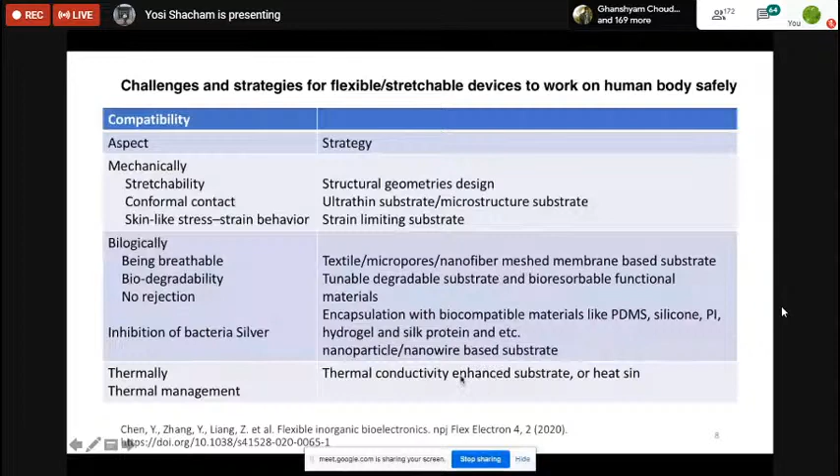So again, why flexible? You can see everybody talks about flexible telephones and flexible electronics. The other advantage of being flexible is it's robust. It does not break. You can have other problems, but if it falls on the ground, it doesn't break. You can fold it, it can be adjusted. Also usually lighter, because most polymers have a specific gravity less than metals, and it can also be environmentally friendly using green materials. And this is a very important issue, because if we are successful in microelectronics, we're using billions of devices, and the waste is a big issue later.

So again, why flexible? We talk today about flexible sensors. The whole field of flexible electronics is a very big field, but we talk today about flexible sensors only, which are mechanically compatible in hardness and robustness. They are biocompatible, for example, using carbon-based substrates, and chemically compatible. You want to functionalize them using organic chemistry.

Since we are using organic-based or silico-organic-based materials, we can do a lot of chemical modifications to the substrate, make them compatible, make them conducting, doing a lot of things. We talk about a specific section on the flexible sensors that are wearable. By the way, not every flexible sensor is wearable, but wearable is a very important section, on the skin, for example. This I took from one of the recent papers.

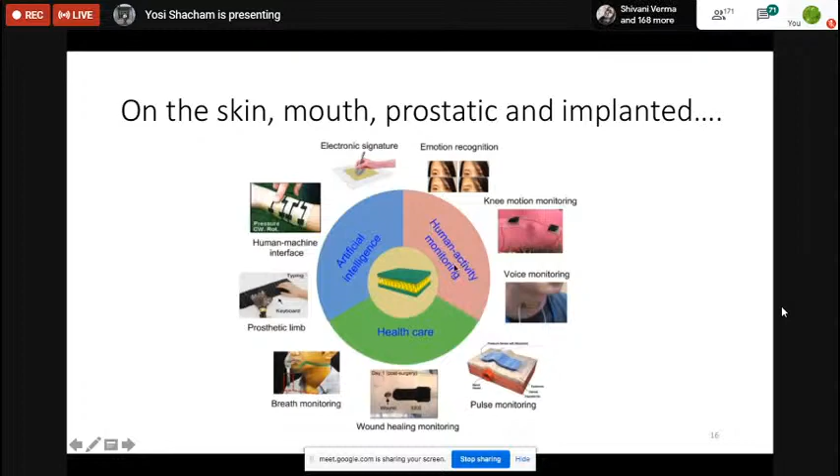You can measure electrophysiological signal, and everything you can transfer to a remote clinical device, and you can do self-diagnostics. You can even use AI, some deep learning mechanism to identify problems, and home healthcare in the future, we anticipate some of it to be, of course, we need physicians and personal contact is important, but many problems can be solved using this.

So if you look at the morphological control of micro/nanostructure sensing materials, and I took it from the same paper, first you'll talk about dimensional materials like nanoparticles, nanowires, nanosheets, and nanopores. There are 0-dimension, 1-dimension, 2-dimension, 3D materials. And from the biomimetic structure, you can make materials which are whisker-inspired, spider's crack-inspired, skin-inspired, hierarchical structures. So next I'm going to talk a little about materials.

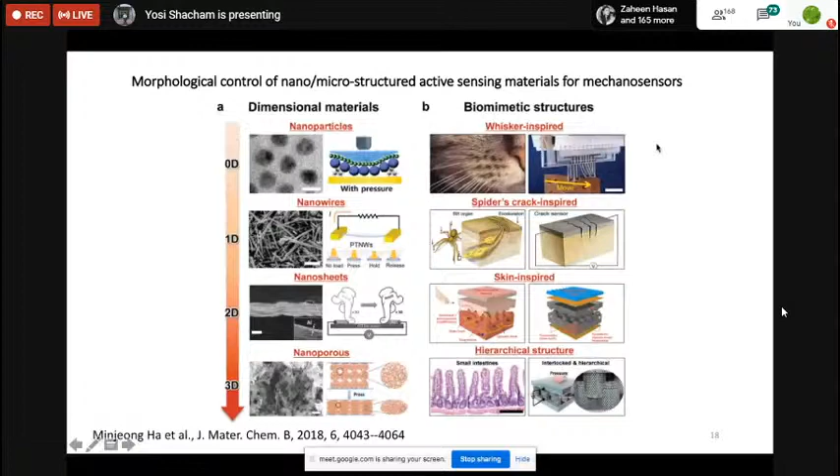And one of the advantages of using flexible materials is that we can shape them in very, very interesting structures, and we can integrate them with a lot of materials. Now, typical sensors, and again, I use this wonderful paper, saves me a lot of time when I present this to my students. What are the mechanisms for flexible devices?

For example, you can use resistivity. For example, you take an elastomer, PDMS, polydimethylsiloxane, with carbon nanotubes. My group, we mix it with gold nanoparticles, but the idea is you make a conductor mixed with an insulator, and when you apply pressure, they change their shape, and when they change the shape, they change the resistivity. So you can use resistivity monitoring, or you can put them between electrodes and measure the capacitance, and the change in capacitance gives you indication on the change of position.

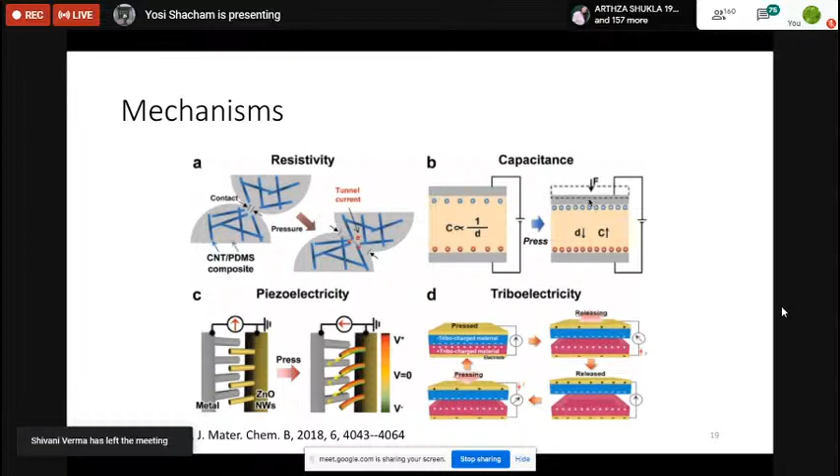You can use piezoelectric materials. We also use them in my group. Here, this paper represents zinc oxide. My group, we use organic piezo materials, like PVDF, but it's the same principle. And another mechanism which recently has a lot of publications is triboelectricity. Tribology is the science of friction. Because of friction, you are generating electricity. So this will allow you to identify lateral forces and shear forces. So with all these sensors, we can identify pressure, motion, friction, position, etc.

So let me give you a few examples before we go to what we do. For example, this is a recent publication on stretchable hybrid materials, and they mention all sorts of possibilities. You can make metal nanoparticles and nanowires inside the polymer, or carbon nanomaterials inside the polymer matrix, or conducting polymers like polypyrrole, polyaniline, PEDOT, and similar materials, and sometimes mix them with the nanoparticles.

And recently, and I have to tell you that I'm following these papers, there's a very new topic. It's called liquid metals. There are some metals like gallium and gallium alloys which are liquid at room temperature. And you can integrate them on polymers. And you can make a beautiful contact, because this is a liquid, and the liquid is absolutely conformal, can take the shape of the structures. And you can ask, how do I control the shape? So you can encapsulate it and bring it in contact with what you want. You just have to make sure that it will be confined.

So you can look at the stretchable hybrid materials, or you can look at geometry. For example, if you want to make something flexible in the X direction, instead of a straight line, you make it like a serpentine. This is some serpentines. Or you can make it with wrinkles.

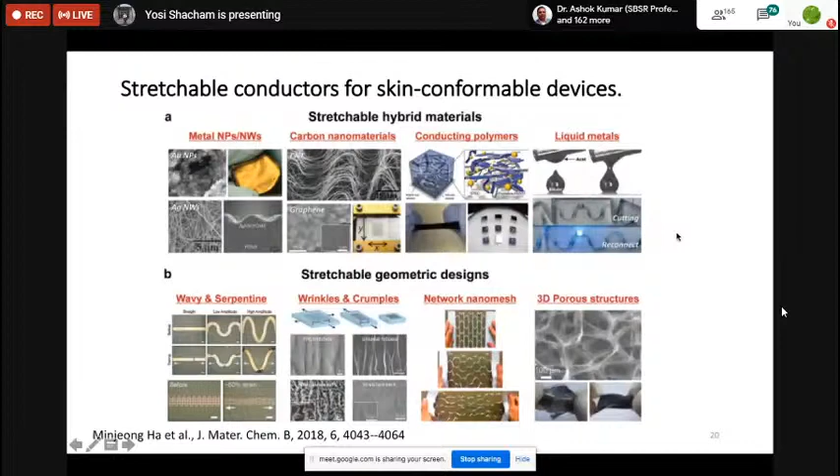Okay, so materials and processes. We talk about polymers. When we talk about sensors, we talk about substrates. The substrate is what the sensor is on, and it can be a polymer. A polymer can be hard, like polyimide, nylon, or similar, or elastomer, like polydimethylsiloxane, PDMS, which is softer, or similar materials. Or other, like photodefinable polymers, ionic polymers, paper, fabric.

And I'll talk a little bit about ultra-thin silicon. If you take silicon and make it very, very thin, it's flexible. This is a very interesting direction, and I'm going to show you some examples. We don't do it, but we follow it, because the major problem is you need a fab to make silicon CMOS, and it costs a lot of money. We don't have it in the university, but some institutes like IMEC in Belgium and other places do. It's an interesting technology, which I'm going to show you today.

And sensor materials can be conductors, semiconductors, elemental, compound, conjugated, can be nanoparticles, core shell, everything in any shape and color and type, can be insulators and nanomaterials, and interconnect and packaging. Don't forget, once you make the sensor, the device, I would tell you the most difficult part, and I'm not joking, is how to interface it with the rest of the world, how to make the interconnect and packaging.

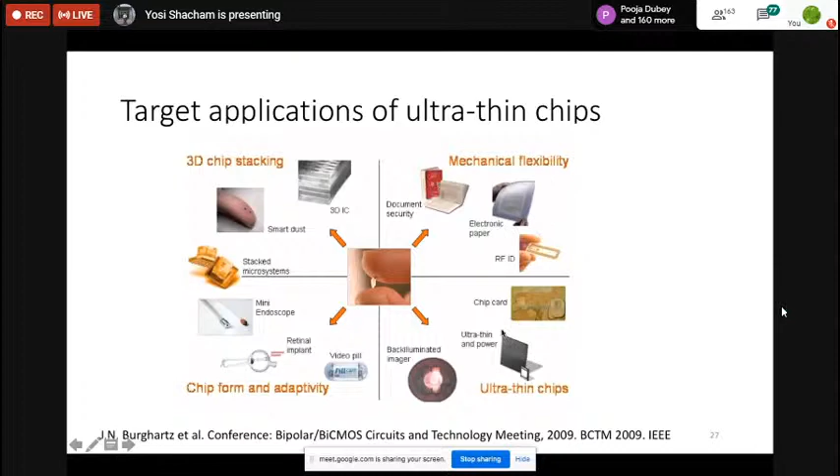Now, we don't do it, but I'm going to show you a little bit of something which really caught my mind recently: CMOS technology, where you take a silicon device and you just make it very, very thin. Because it's very thin, you can do 3D chip stacking, mechanical flexibility, ultra-thin chips. This technology, by the way, is called chip film. It was published first in 2009.

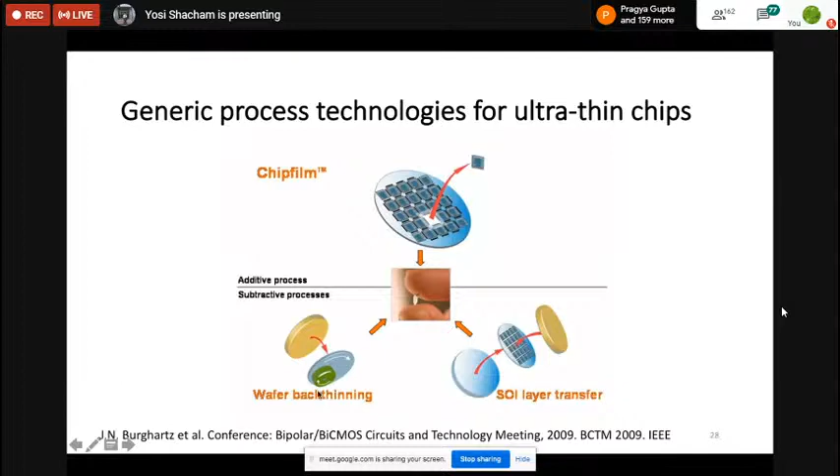The idea is you take a silicon wafer and just make it very thin. This is it. With 20 micron silicon, you can see how between fingers it can bend. You can force it into a radial structure. You can make it with mixed signal. This is a complete integrated circuit, and this is the beauty of this technology. It's just very expensive to make yet.

I mean, everything is very cheap, but you need more than $100 million, I guess, at least to build the facility, sometimes more. But on this area you can have a few millions of transistors and signals. So you can make the whole system on a chip with the electronics and everything. For example, they make it like a smart monitoring system with an RFID tag. And this is, I would say, one of the technologies to follow.

It's not as flexible as polymers. It has its own problems, but the advantage is you can put a lot of electronics, so I'm sure people will find good applications for this technology.

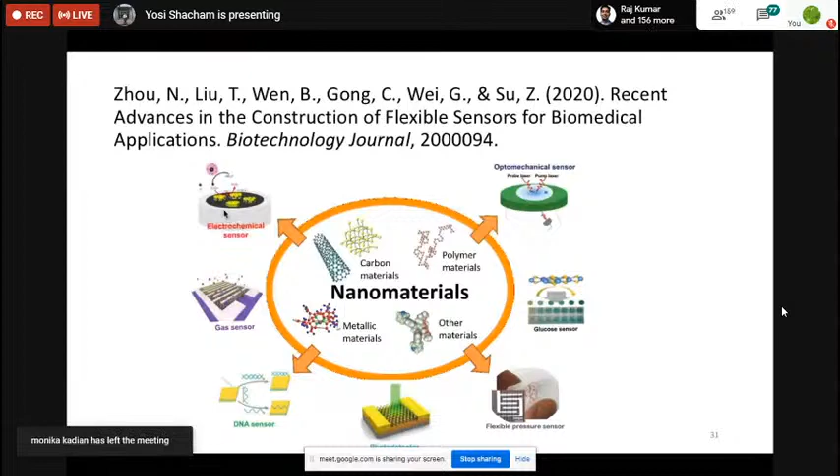Nanomaterials. This is a very recent review that was published this year. We talk about carbon nanomaterials, polymer materials, and other materials, and you can see the electrochemical sensor, gas sensor, DNA sensor, everything. People use nanomaterials, and I'll skip this slide. We work a lot on nanomaterials in my group; we developed zinc oxide and nickel oxide nanomaterial-based electrodes together with Professor Salva Mirabella from the University of Catania.

This is a classical electrochemical sensor. You put nanomaterials on top of it, and then you bind to them. For example, you bind antibodies, antigen to detect; this is, for example, the ELISA chip. So you can use carbon nanotubes, graphene, indium tin oxide, nanowires, metallic nanoparticles. We use a lot in my group indium tin oxide, zinc oxide and nickel oxide. And we bind to them all this biological material to make the sensors.

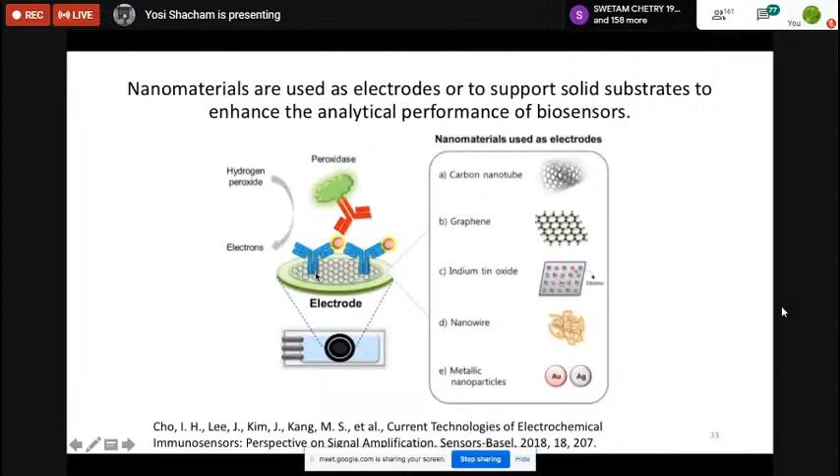And the advantage of nanomaterials is a very large surface area and very small size, so you can use them as a binding post for all this biological material. I will not go through all the details of this slide. I just want to show you a few more slides before going to the rest of the talk: a flexible integrated sensor array for multiplexed perspiration analysis.

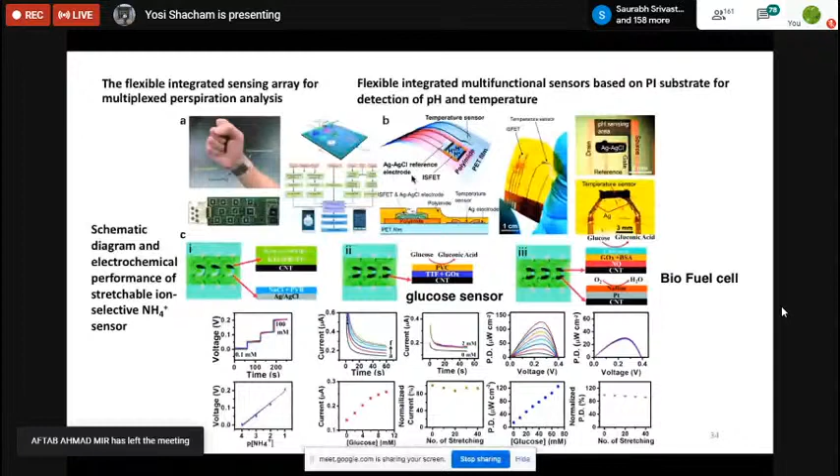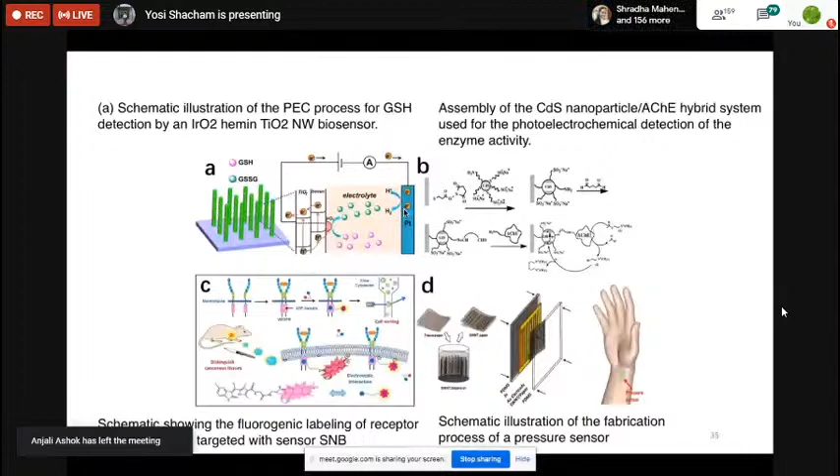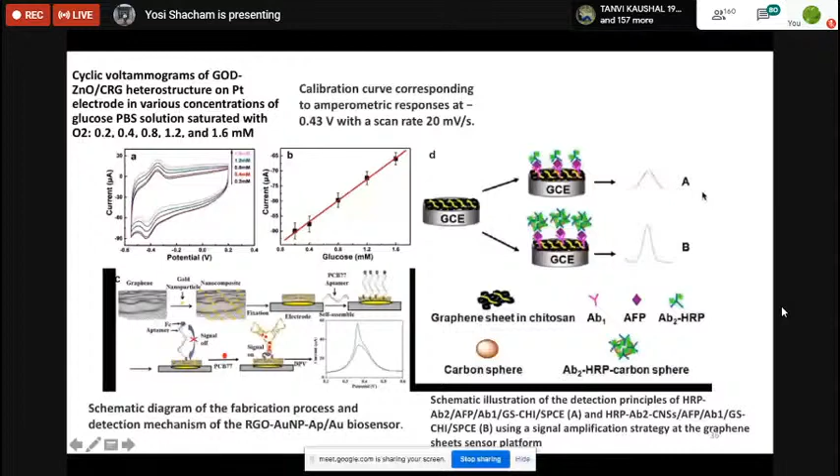And I think this is my last example, and I show it because it's similar to what we do. We do a lot of electrochemical sensors. So naturally in this talk I will give you more examples of electrochemical sensors, but I don't want you to get the wrong impression. There is a lot of work on optical sensors and other sensors. Just because of the limited time, we talk about electrochemical sensors; we want to do something like cyclic voltammetry and measure. Again, I'll skip this slide, and let's talk now about something more specific: flexible electrodes.

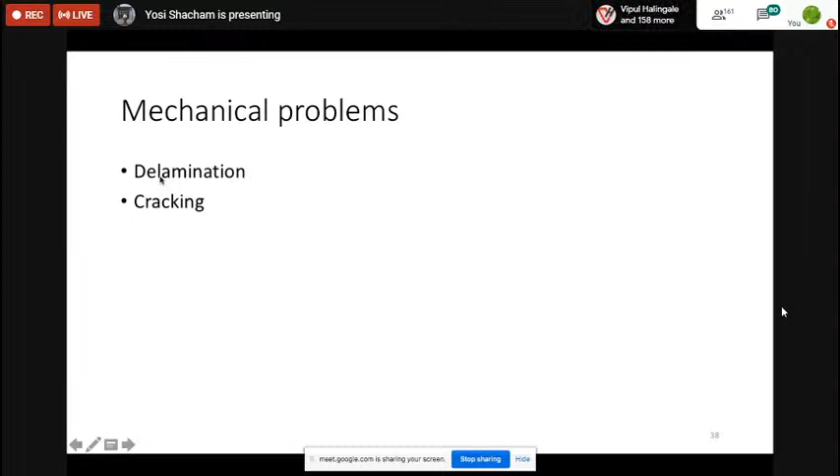As I told you before, you need flexible electrodes for two major applications. One is the whole part of what we call electrochemical sensors; you need flexible electrodes. But even if you make optical sensors and other sensors, you need interconnects to the optical devices, and the interconnects also have to be flexible. So you use polymer substrates, conducting electrodes, and reference electrodes. And we have a lot of problems: delamination, adhesion of the materials, and cracking is a big problem. Today I will talk a lot about cracking.

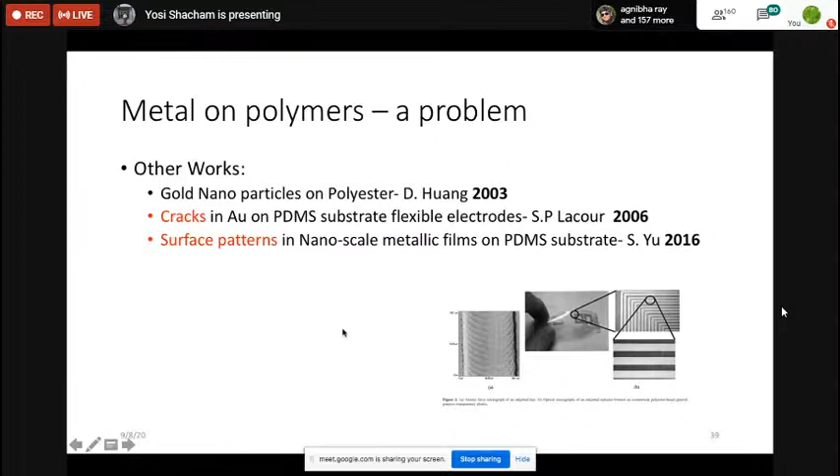So the challenges are the following. First, the patterning issue, since we deal with structures which can change their shape, and they can also be non-planar. The problem here is most people use projection lithography, photolithography, to pattern microstructures. With projection systems they have a big problem of defocusing, which means you cannot do lithography on a non-planar structure.

You have the issue of the photoresist. When you do photolithography, the idea is practically you make your design, you take a big camera, you project your image on the device, and you do the process. The problem is that all lithography uses polymers, and your substrate is also a polymer.

And it's also very difficult to make the compatibility that one material will not affect the other material. So there's a lot of patterning issues in flexible sensors. It's very complicated to do the patterning. It's very difficult to do polymer substrate and polymer lithography. You have material problems, materials from different families, like metal on polymers, and you have a big mismatch in material physical properties that might cause very big reliability issues.

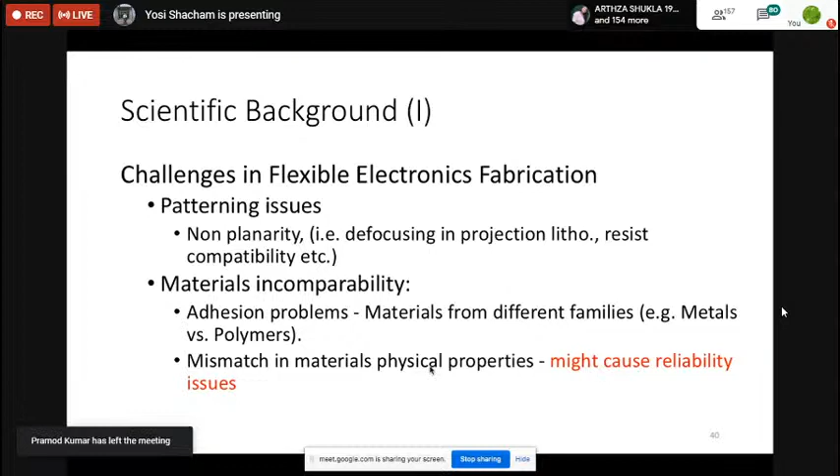So what are the solutions? What are the research frontiers today in making flexible electrodes? One is metal printing. Can we do a metal inkjet? All of you, or most of you, have an inkjet printer, but you are printing ink. Can we print metal ink? Can we use conductive polymers, carbon nanotubes, graphene? Our presentation is metal on elastomers, which is what we discussed today.

So our process, what we developed at Tel Aviv University in collaboration with the University of Milano, is flexible electrodes using femtosecond laser ablation on thin metal films on polymers. So what I'm going to do now, I'm switching from the large overview of the field. Until now I gave 35 minutes of review of the field of flexible electrodes. I described all the materials, and in the next 20 minutes, I'm going to talk about what we do,

how we solve the problems. And one of the biggest problems that everybody faces is metal failure due to cracking. And next we show patterning flexible electrodes using femtosecond laser ablation and the origin of the crack. In order to solve the cracking, I will explain to you why there is cracking and how to avoid the cracking, how to make reliable sensors.

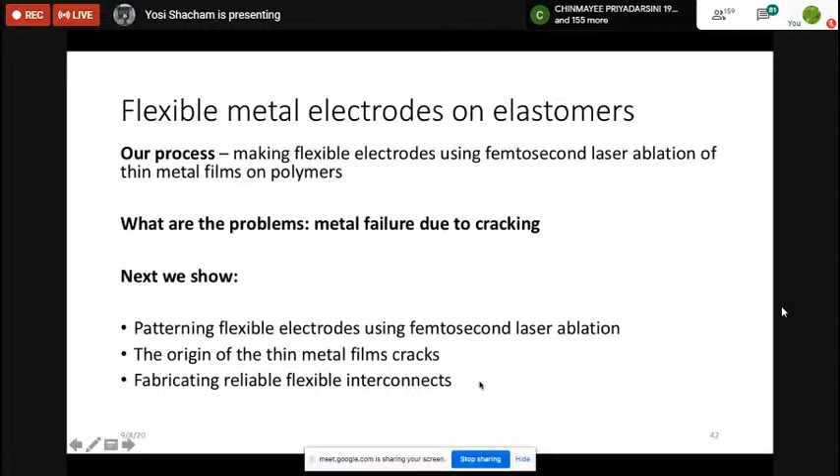So first, one of the technologies which is very promising now, and many people are doing it, and we bought this system a few years ago. We are taking a laser, and this is a femtosecond laser. We're using the 343 nanometer wavelength, which is ultraviolet. We're using pulses, approximately 270 femtosecond pulses. We have a galvo scanner, so we can scan with the beam.

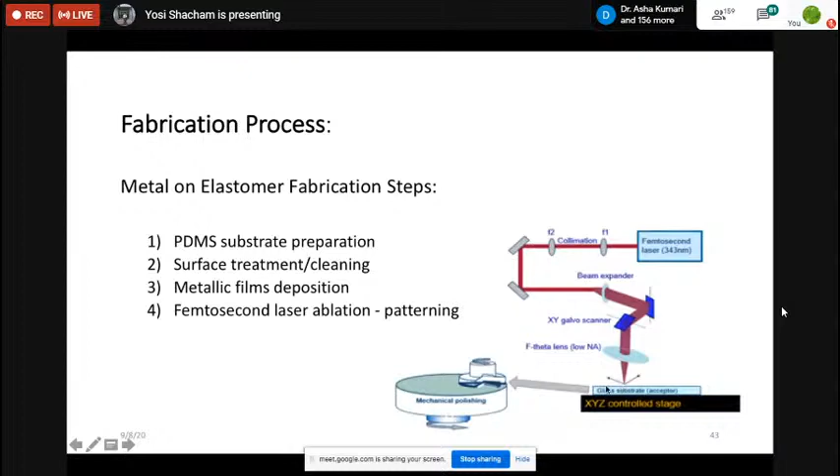And first we prepare the substrate, then we do surface treatment and cleaning, then we put the metal, and then the laser beam is ablating the metal. So I'll go quickly. First, we take the PDMS. PDMS is the polymer, an elastomer. It's not going to be a class in material science, but the way to make this polymer, you buy cross-linker, you buy the monomer, you mix them together, wait 24 hours, you have the polymer.

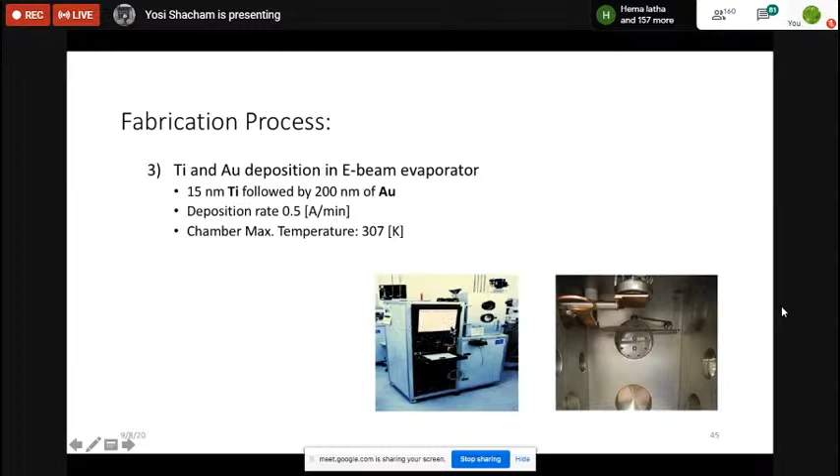So we can control the composition. For example, 1 to 10 is very much used, but I'm going to show you later that the reason I'm showing you this slide is because we can control the mechanical properties of the polymer. And this is going to be a big, big issue. Next, we clean the surface, oxygen plasma. Next, we put titanium and gold on top of it. This is our new evaporator.

And then what we do, you have a substrate with gold on titanium on the polymer, and the laser beam is ablating. And the nice thing is the following. In these wavelengths, the PDMS is transparent, but the gold is absorbing. So we can pattern, and because it's femtosecond, there is no heat diffusion, because it's very short pulses. The pulses are, as I told you, about 270 femtoseconds.

So because the time is so short, we have a huge, huge energy density per unit area. So the ablation is so fast that the rest of the substrate does not heat. And because of that, we don't have damage to the polymer under it. I'm going to show you the structures later.

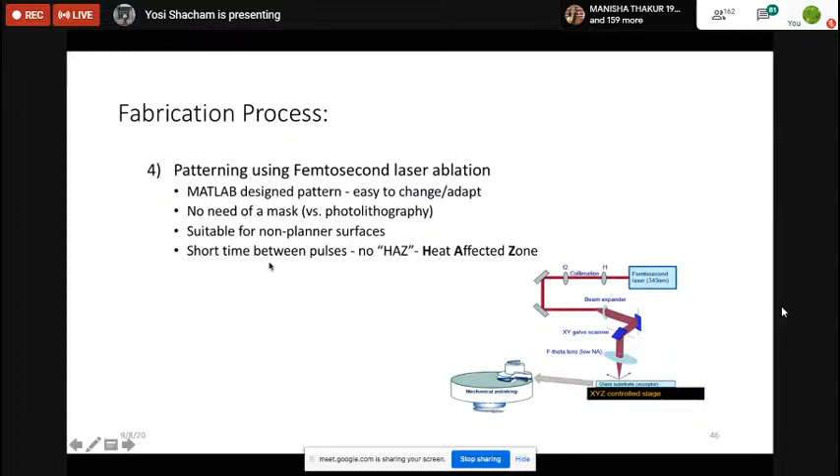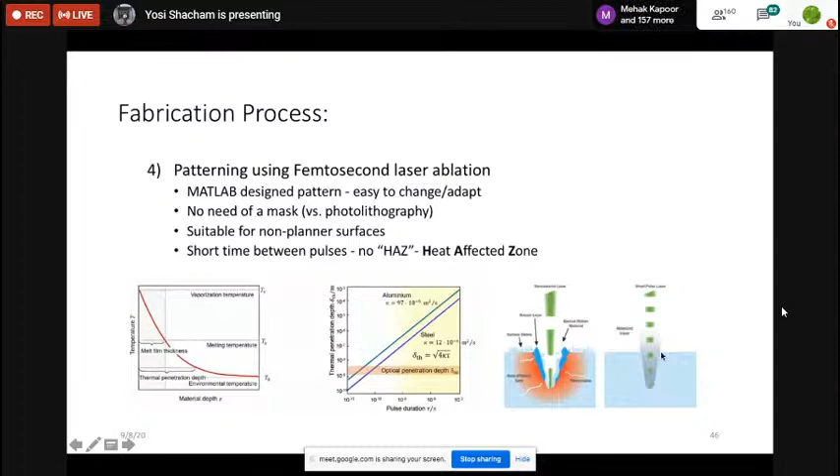Practically, let's focus on this part. If you have a nanosecond pulse, this is the laser pulse, you're heating the structure, and the heat, this is the red zone, is propagating. If you have femtosecond pulses, you are ablating the material, but because the time is so short, the diffusion length of the heat, which is the square root of D, diffusivity, times time, is so small, maybe a few angstroms, so there is no heating, only ablation. And because of that, we get a much, much cleaner cut and much nicer structures.

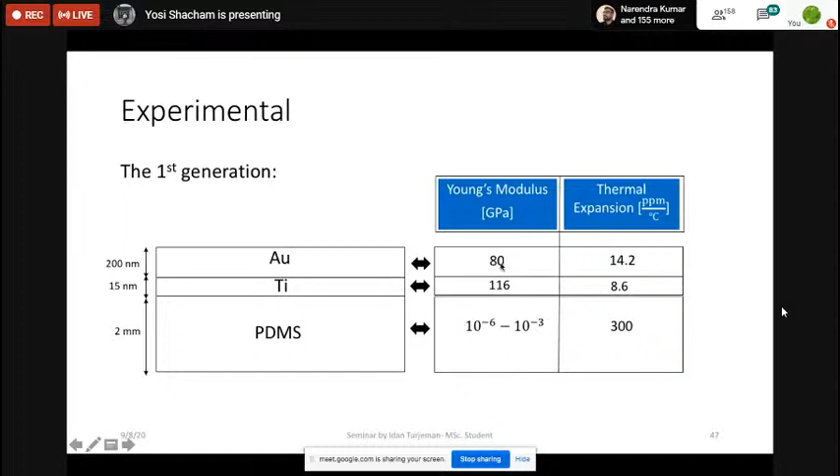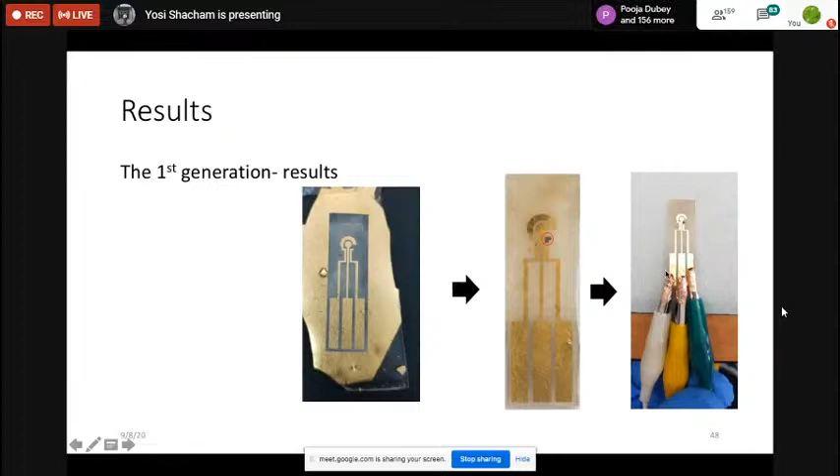And we put the 3, you see, this is students' interface, 3 crocodiles. You can do better. The problem is, when you look very close, this is what you get. When you deposit gold on PDMS, this is what you get. On regular PDMS, you can solve this problem, don't worry. It's the new generation, this was the first generation.

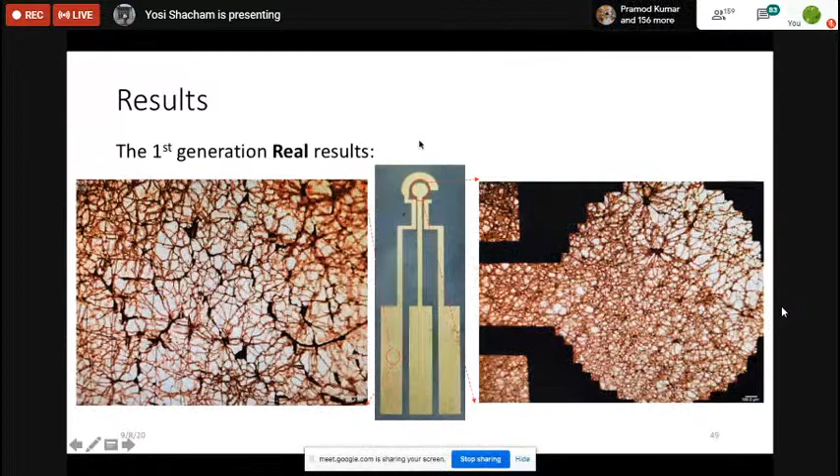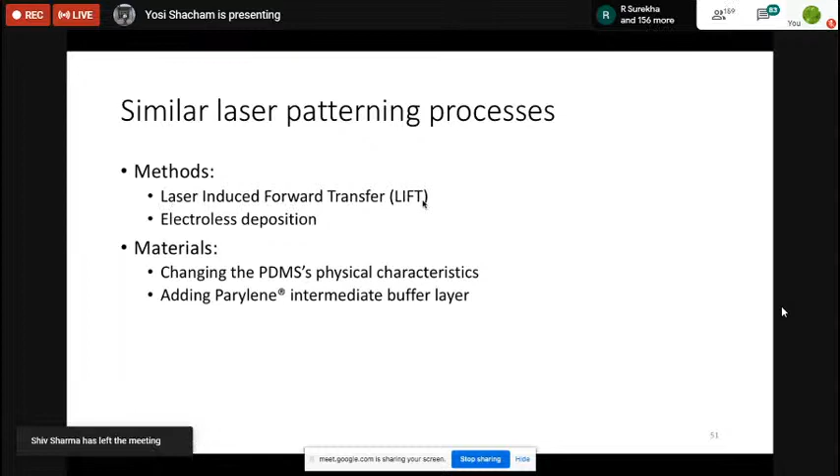So we say, oh, what should we do? Different deposition method, different materials, maybe change profession. No, so one issue, we say, let's try to see if we have another technique. So we looked at we have a laser, and there is a technology called LIFT. And LIFT is the following. You take the glass, on the glass you put the metal. And then you are illuminating from the back side with a laser.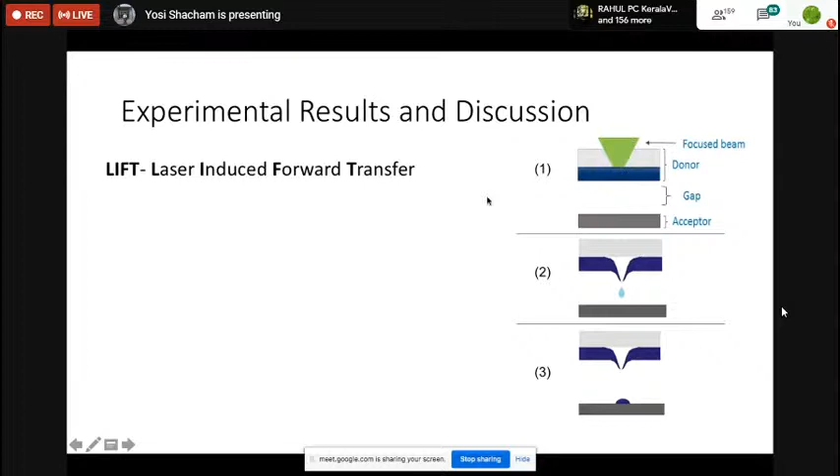And because you're illuminating from here, you are generating a drop, and the drop is going down and deposited on your substrate. So you go to a different point and deposit another drop. And then deposit another drop. And then you can make an electrode. So this is called LIFT. And because we have a laser and you're taking your substrate, it's called a donor. And from the donor, you are generating metal drop. This is like an inkjet printer.

But instead of having a cassette, we have a substrate of glass with gold. And we put drop, drop, drop, drop. We can put more than 100,000 drops per second. And you can take many beams of the laser, so you can work very, very fast. And this is a commercial product. There is an Israeli company called Orbotech. They make this device, and they are actually very useful devices.

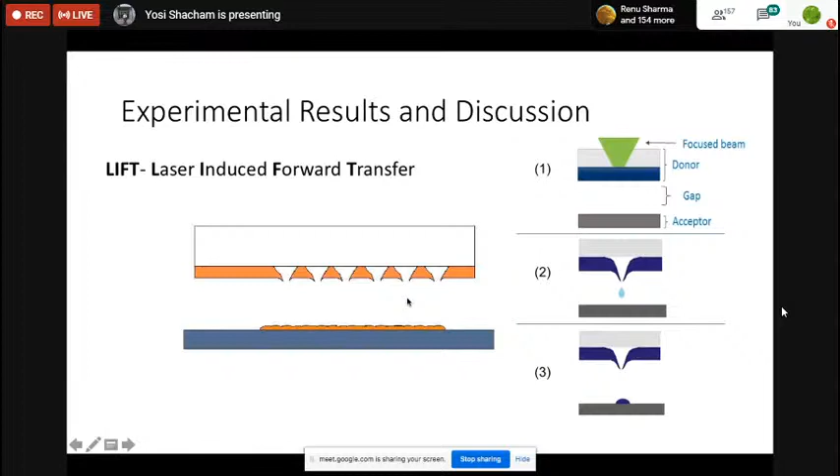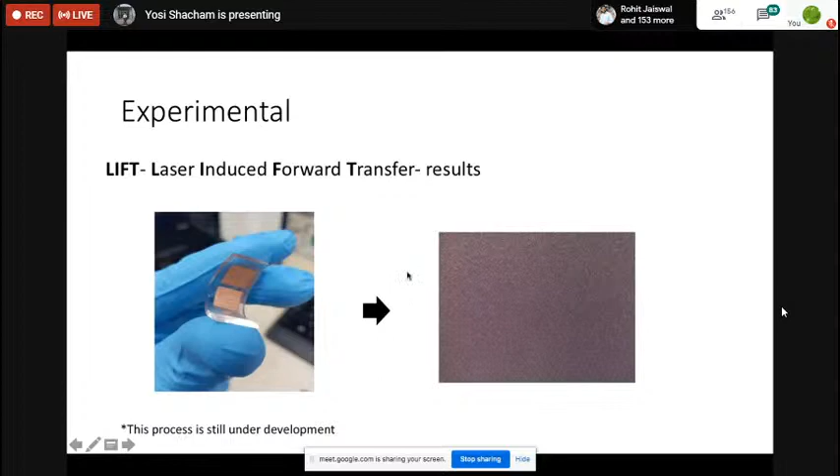So this is how it looks. These are the electrodes on the soft polymer on PDMS. And this is how it looks. You see no cracking, no nothing. It really gets very good results. But you know, we are a university, anytime we solve a problem, then we look for another problem. We still have this problem of cracking of the normal process.

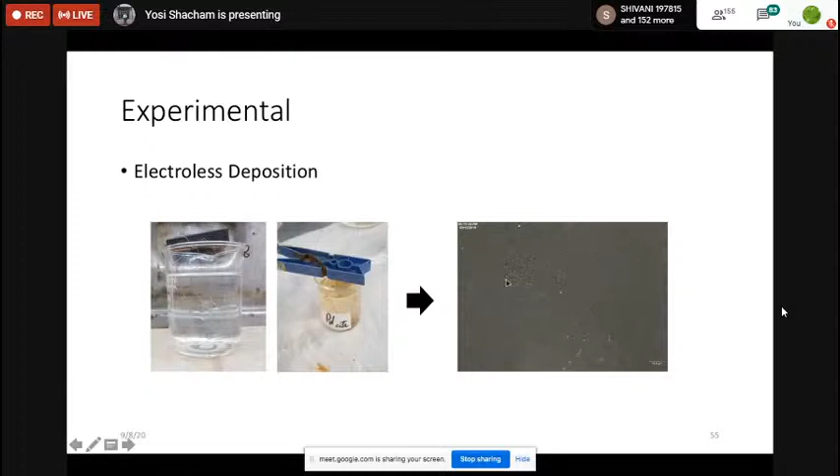So we clean, we etch, we catalyze the seed, we do electroless plating on top of it. And electroless plating on top of it solves a lot of the problems because we can do some combination of a softer material, but we still had some cracks. This is electroless deposition. And by electroless deposition on PDMS, you see we got no defects, but we still want to understand why we get cracks in the old process, because we really like to do evaporation on plastic because it's commercial technology.

So we looked at the modulus as a function of the crosslinker. Remember how we make this polymer. We take a crosslinker, mix it with the monomer, heat it, wait. And we look at this table and we saw, well, we can control the Young's modulus of the polymer between 1 to 10 megapascal by controlling the crosslinker. And let's see what happens.

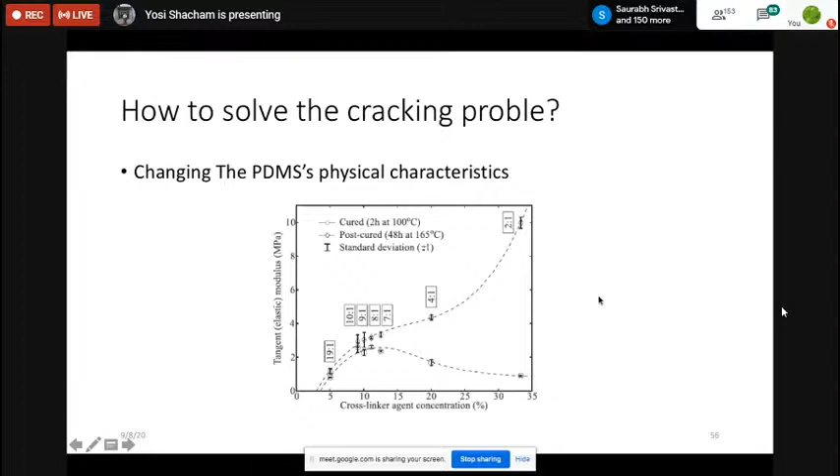And surprisingly, when we do 1 to 2 ratio, no cracks. We still have wrinkles, but no cracks. 1 to 19 ratio, we got beautiful cracks. So we want to understand why. How come this very soft polymer with the Young's modulus of 10 to the minus 3 gigapascal is breaking, making cracks for the gold, which is more than 10 gigapascal.

So we took the structure. This is another experiment. We try to be smart. So we put between our polymer and the metal another polymer called parylene with the modulus of 1, which can be between the two. Still got the same cracks. So we say we need to solve this problem.

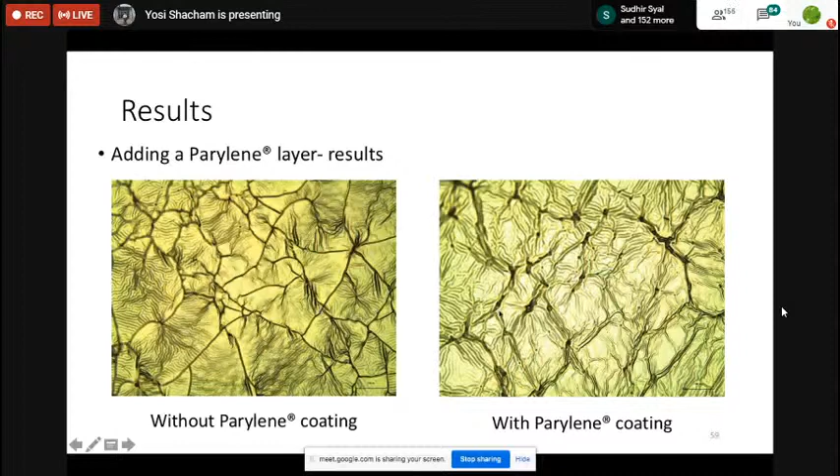So what we do, we are engineers, we do mechanical analysis. I will not give you the whole structure, but we are doing all the calculation of the forces in the structure. And we write a code, everybody can use it. We published this in a paper recently.

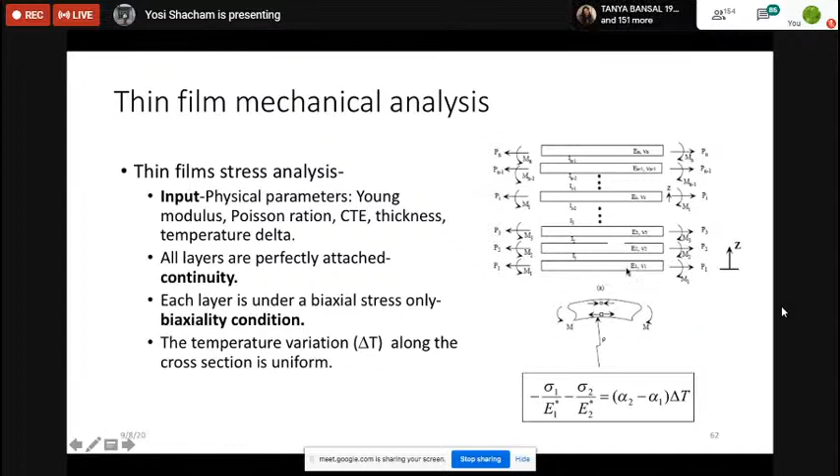That we can calculate the stress in this material, and because we want to deal with more than one layer, we develop it. This can be polymer, metal. So we solve it for multi-structure. And then we apply this solution to calculate the stress in our materials.

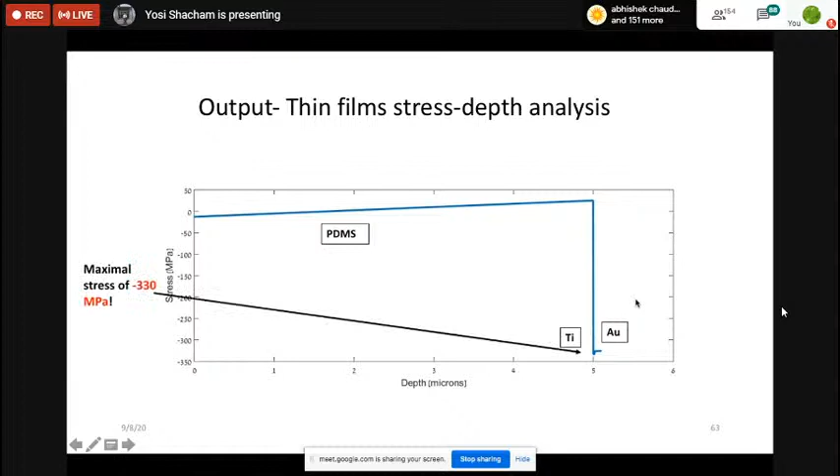And what we found out is that PDMS is a very soft material, but it's incompressible, it's not compressible. And the problem is the gold and the PDMS have different coefficients of thermal expansion. So when you heat them and cool them, the PDMS is applying a huge force on the gold. And this is gold. This is the CTE of gold. This is the Young modulus of gold. This is the Poisson ratio.

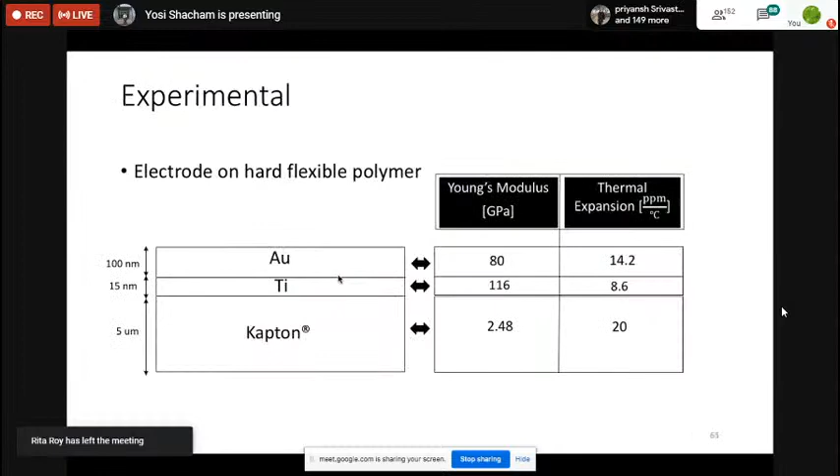So this is the problem. PDMS has a huge coefficient of thermal expansion. So we need to reduce the coefficient of thermal expansion of the polymer. So one option is to switch to Kapton. It's less flexible, but with much, much less coefficient of thermal expansion. And we did the calculation again and found out that for Kapton, the stress is only 13 megapascal,

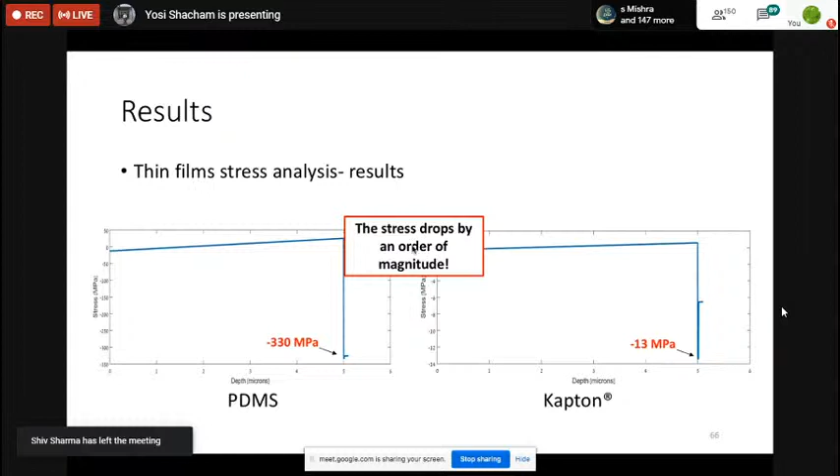and the stress dropped significantly. And just to give you the mechanism of cracking, if you have a PDMS, you put the metal on top of it, and when the device is cooling down, this is applying a force, and you have something called wrinkling. It's a non-linear phenomenon, and this is the critical stress for wrinkling. This is taken from a textbook, and these wrinkles break here on the bottom of the metal.

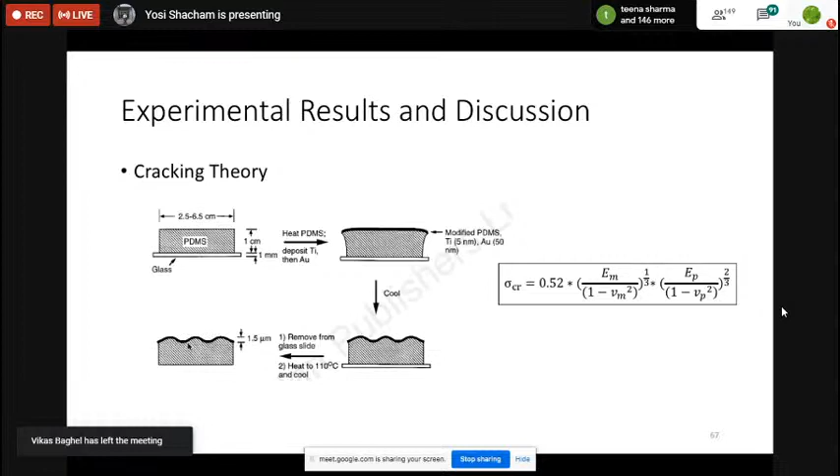And the critical stress for PDMS is 0.2, and for Kapton is 18.9, which means, first, what we found out is that if we deposit it on Kapton, no cracks, no nothing. Or alternatively, we change the composition of the PDMS to increase the Young modulus of the PDMS and to reduce the coefficient of thermal expansion. And then we solve the problem.

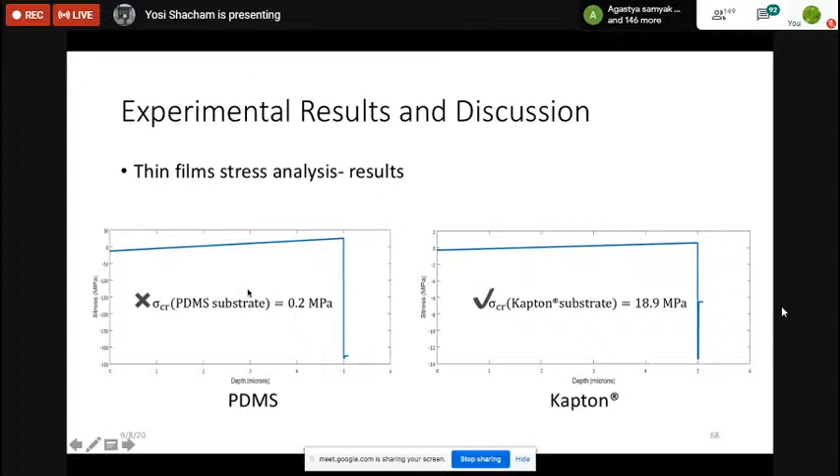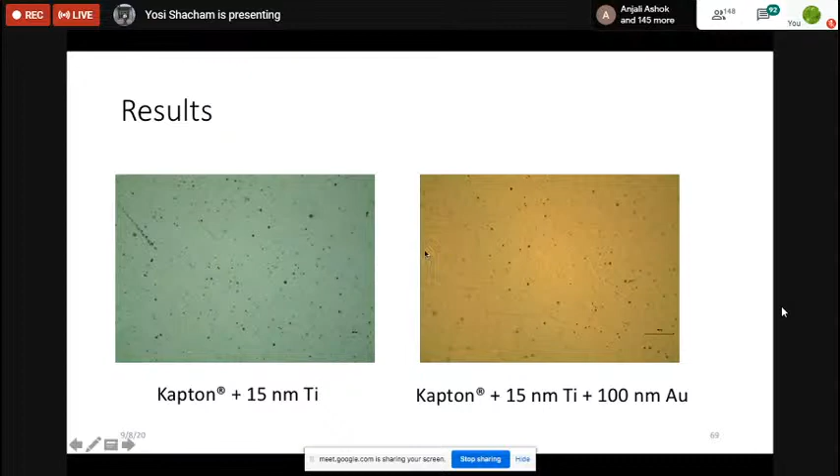So we developed a whole system not only to make electrodes, but to analyze when they break and when they don't break. And we have a table: everybody that wants to use metal X on a polymer Y, we can predict beforehand if it's going to crack or not. So this is our contribution, that we can forecast for any combination of any metal whose properties we know, if it's going to crack or not.

So this is our conclusion. The origin of the metal film cracking is the difference in the coefficient of thermal expansion. And also the elastomer is soft, it applies enough stress, and Kapton can serve as a substrate for flexible interconnects. And a combination can be: you do a Kapton substrate, then on top of it PDMS, and then metal.

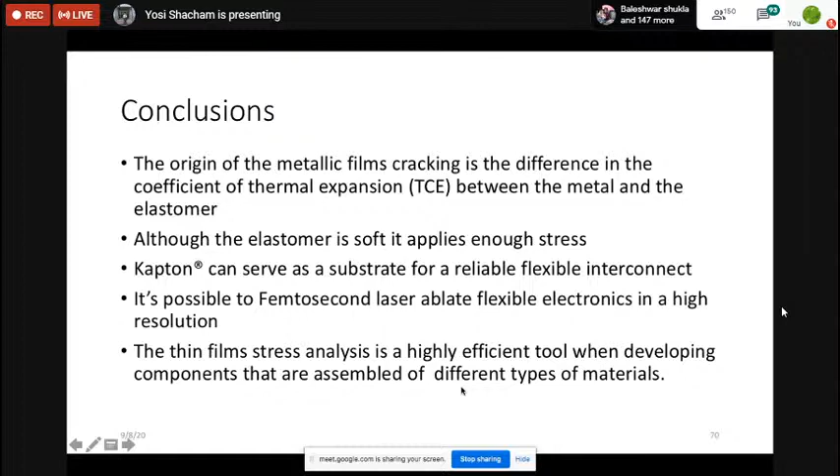And femtosecond laser ablation is a good technology. And thin film stress analysis is a very efficient tool when developing components that are assembled of different types of materials.

The last topic I want to talk about today is a very new technology, which I think is very promising. It's a combination of nanoparticles and PDMS. And the idea is the following. This is called supersonic cluster beam deposition. There are a few systems like this in Europe, and we had a huge research program with University of Milano, the Catholic University in Leuven, University of Birmingham, and other universities.

And because they have the tools, and we don't have the tool in Israel, they make the samples for us. We focus on biomedical devices, and the idea is to take a source called a cluster source, and you generate nanoparticles of metals. These nanoparticles can be 1 or 2 nanometers in size. You accelerate the nanoparticles, and you shoot them into your PDMS. Remember, PDMS is your flexible substrate, and you want to make the flexible device on the substrate.

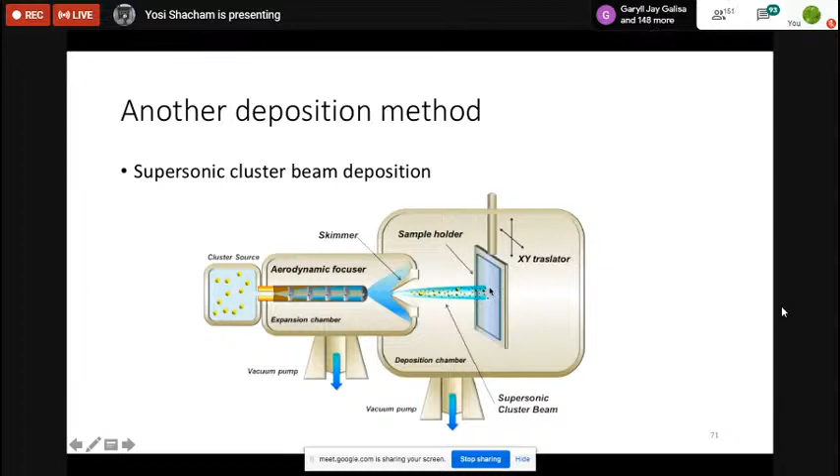So you put gold into it. And this is how it looks. This is a supersonic cluster beam deposition. This is PDMS, the polymer. And you can see if you implant enough gold, this is the PDMS with gold nanoparticles. It's a composite material, a porous material. It's approximately 50% gold, 50% PDMS. And you can even make it more.

And what happens, this is a very, very flexible material. The gold nanoparticles with low energy and neutral electrical charge are implanted in PDMS. The nanoparticle concentration provides ohmic conduction together with PDMS stretchability. And actually, there's even a company now in Italy making and selling this technology.

The gold nanoparticles are synthesized by a technology called cluster source. A set of aerodynamical lenses collimates the cluster beam, and the gold nanoparticles penetrate the PDMS matrix. Professor Milani is measuring resistance versus the actual thickness of the gold, and you can see that initially the resistance is very, very high. This is ohm centimeter. This is very, very high.

This is 100 nanometers of gold. If you have less than this, the resistivity is huge. It's not infinite, but giga ohm and more. Above 100 nanometers, the resistivity goes down from 1 kilo ohm centimeter to 10 to the minus 2. The resistivity goes down by 5 orders of magnitude. And you can use it, by the way, to measure position and to measure stress. And then it becomes like a gold deposition.

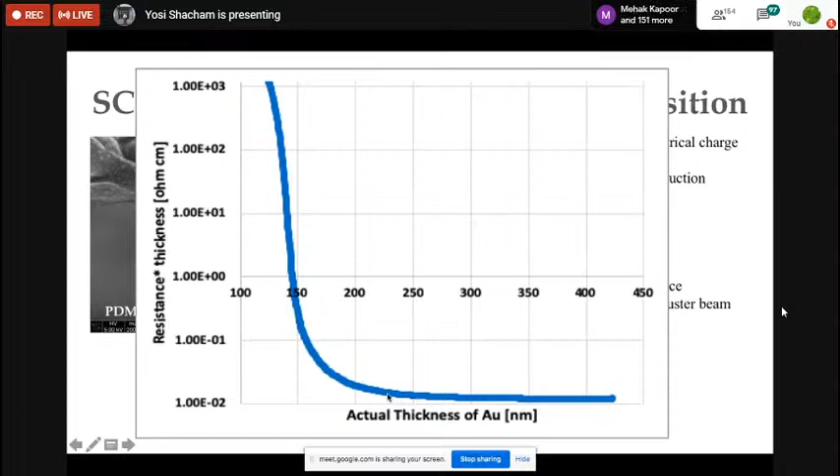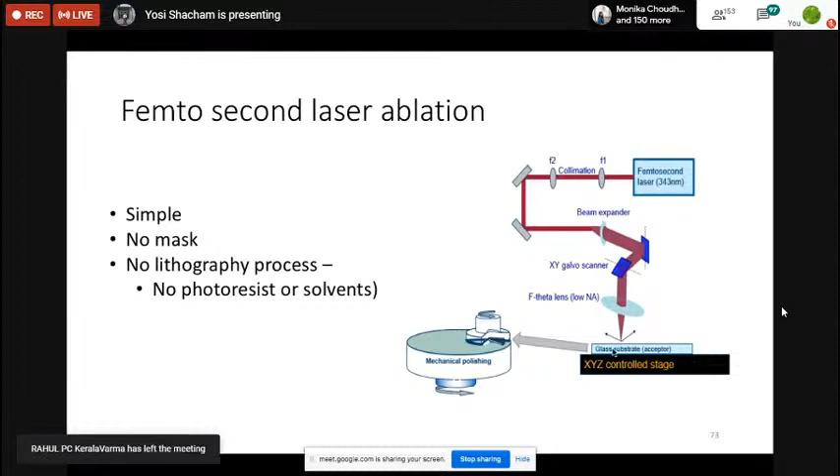So if we deposit 200 nanometers, we can have a good electrode, because it's flexible like PDMS and conducting, not like pure gold, but 10 to the minus 2 is a pretty good conductor. And again, we use the laser processing. It's simple, no mask, no lithography. Students can do the design at 8 o'clock in the morning and have the device at 9 o'clock, in 1 hour, and test it. And these are the devices.

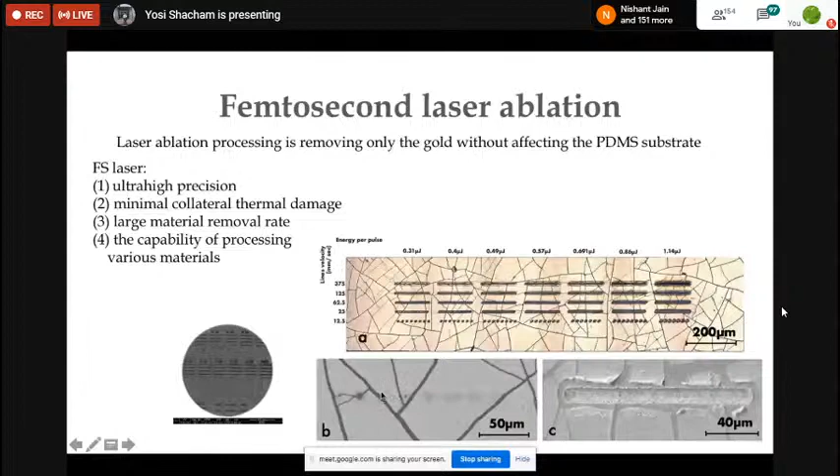By the way, you can see here that we used the monomer and the PDMS with a relatively high CTE, so we got cracks. But the good news is, even though we have cracks, all the devices worked, because the cracks are only on the gold on top of the PDMS. The gold inside the PDMS is still conducting. This is top view, this is the cross section. And this is how it looks.

This is a better sample. I showed you good samples and also bad samples. The first run had a lot of cracks. The second run was actually much better. And this is the laser processing. We can go down to 3 micron lines, and you can see this is a 3 micron electrode.

This area here is called HAZ, heat affected zone. I told you there is no heating, but there's a little bit of heating. So this heat affected zone is about 1 micron. So we can make 3 micron electrodes. Usually we don't need such electrodes. Most of the devices are 90 or 160 microns. This is how it looks.

And just to show you that we have working devices, we make electrodes with different widths and measure the resistivity, and this is 1 over resistivity versus electrode width, and we proved Ohm's law, resistivity proportional to 1 over the width of the device. We calculate the specific resistivity, and you can see it's about 2.6 10 to the minus 3 ohm centimeter, which is excellent for electrodes.

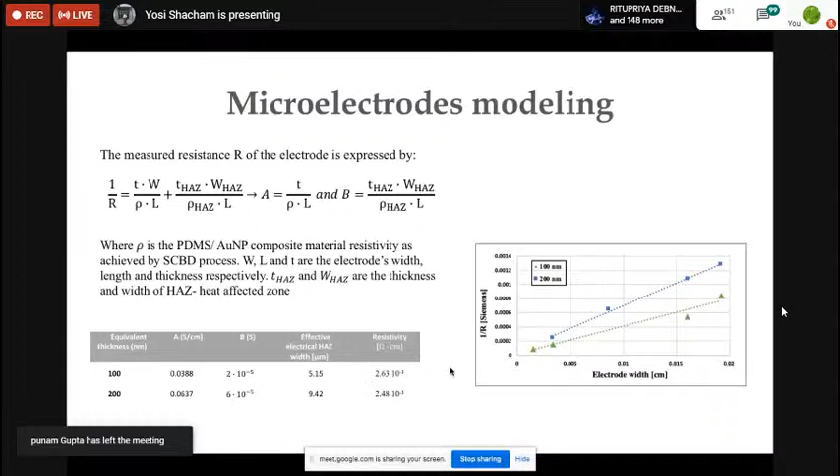It's not as good as pure gold; pure gold will be 3 orders better, like 4, 5, 10 to the minus 6. But this is like polysilicon, like indium oxide, like zinc oxide. It's pretty good material, pretty good conducting, and very, very flexible, really very flexible.

So to summarize this talk, and I promised Ragini that it will be between an hour to an hour 15, so we are close to the end of this talk today.

The interim conclusion is that soft and flexible microelectrodes were fabricated by integrating a novel metallization and patterning process. We can go down to 3 microns by laser microprocessing. The microelectrodes fabricated by supersonic cluster beam deposition and femtosecond laser have the conductivity to act as electrodes. We use it for plant sensing, but Professor Milani is using it for electrodes for the brain and for the skin. And a lot of applications for this technology are now being investigated.

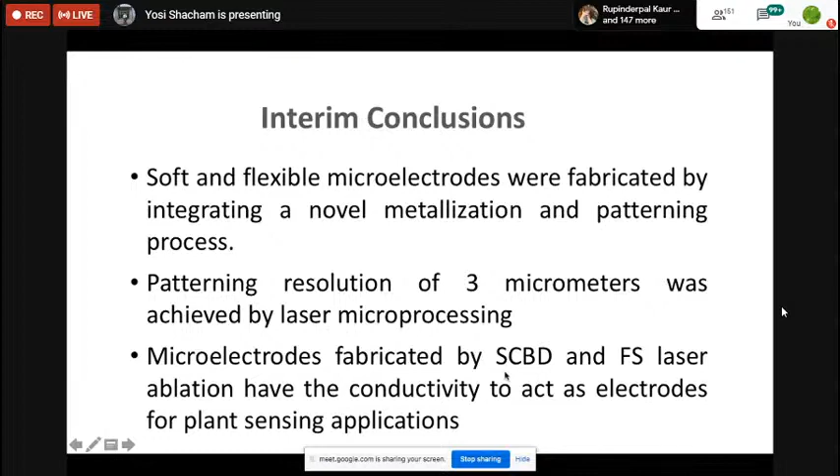Now, to summarize the whole talk, I started with an overview of the field, and then I showed you what we do. We have other projects, but because of time constraints, I focused on what I would say are the most hot topics. By the way, what I showed you recently was accepted to the materials conference, where I'm going to show this presentation in October in Europe.

It was accepted for oral presentation, which is very respected because they accept, I think, 1 out of 10 papers. So I'm giving you a sneak preview of the MAM conference this year, the Materials for Advanced Metallization Conference. And the other paper on the stress was accepted to this conference also, but only for poster presentation.

If you go back to the topic I talked about today, flexible microsystem technology is available for biomedical applications. So if you need something, you can do it. You just need access to a clean room and to a manufacturing facility. In Tel Aviv University, we don't have it.

I'm also visiting very often BITS Pilani in Pilani, and they have a very nice facility next to them where they can make nano electrodes. And I hope in India people will have more and more clean rooms, more facilities. India is a big country, and you should have a technology to make electrodes, flexible electrodes. There's a lot of technology, but also a lot of interesting science.